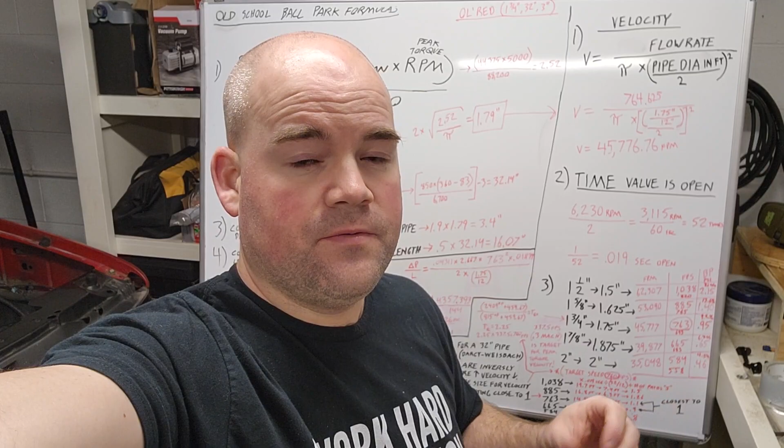This video is going to be two parts. The first part I'm going to give you some old school formulas that'll help get you close, and if that's all you care about, you can do with them however you want. For the rest of you more interested in the science behind it, we're going to talk a little more technical and go into how I chose what I chose for Old Red.

Alright, so I'm going to go over to the board and zoom this out a little bit. Old school formulas first. Old Red has 1 3/4 inch header primary tubes with 32-inch length primary and 3-inch collector. So, old school ballpark formulas.

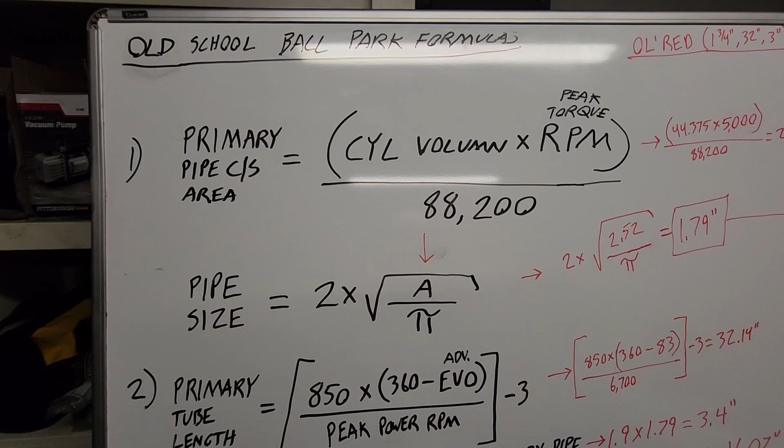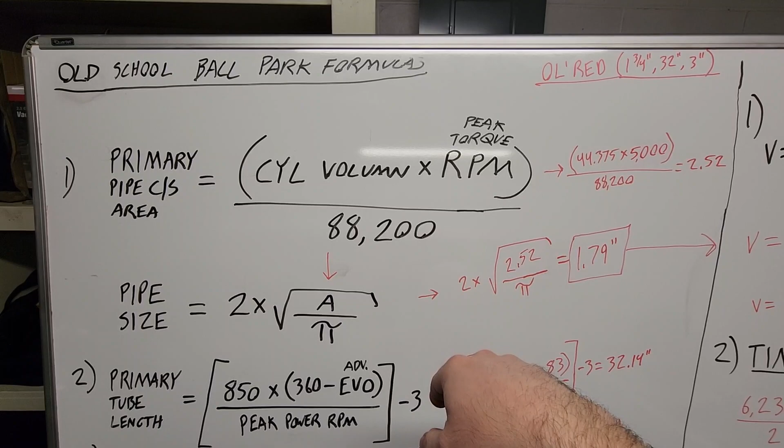Primary pipe cross-sectional area - calculate that first. If you have a 350 cubic inch engine, put that in divided by 8. Multiply that by peak torque RPM - if you don't know what this is, what do you want it to be? Divide that by 88,200, that'll give you a number here.

This is your area, cross-sectional area. So for a 355 small block, I have peak torque around 5,000 RPM, divided by 88,200, and that's your area.

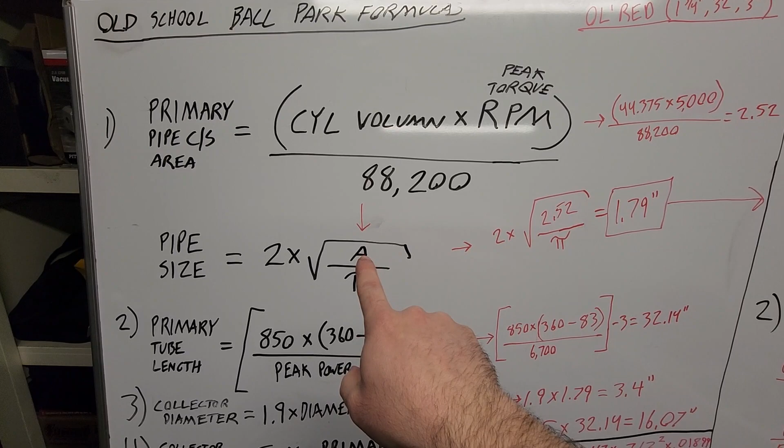Pipe size - I don't care about units, I don't have enough board space to put units for everything, so you'll be alright. Pipe size is 2 times the square root of the area we just calculated, divided by pi. So get that, 1.79 - pretty close to my 1 3/4 inch primary tube, so pretty close.

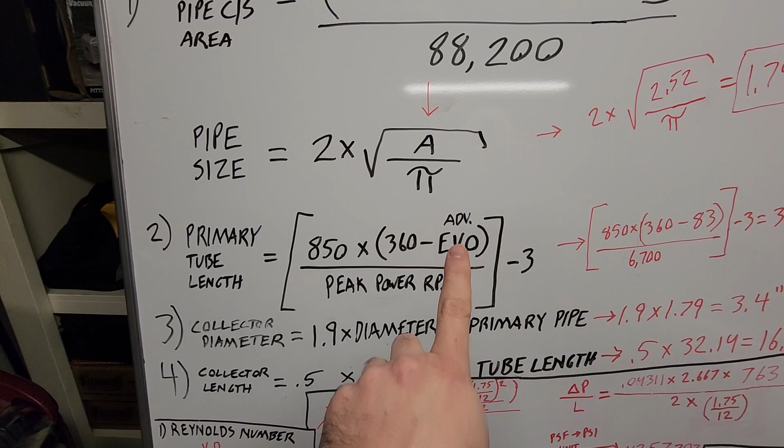Primary tube length: 850 times 360 minus advertised exhaust valve open. Do not use your at 50 thousandths number, use the advertised exhaust valve open before bottom dead center. Put that number in, divide that by peak power RPM.

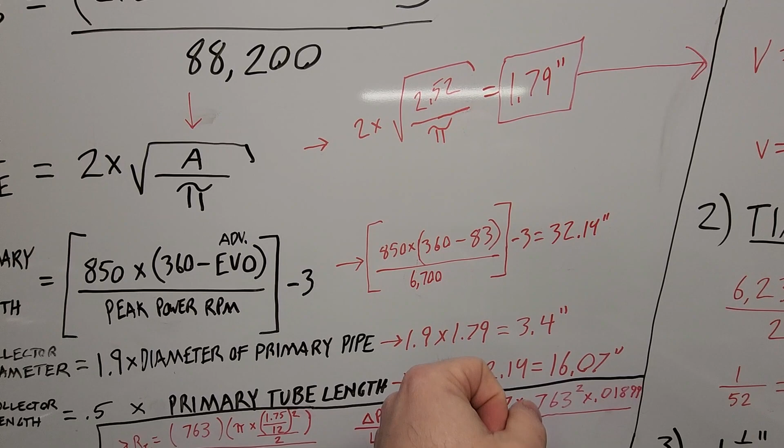850 times 360 minus 83 degrees before bottom dead center, which is when my exhaust valve starts to open, divided by 6,700 RPM - pretty much where I make peak power naturally aspirated, more like 6,300 under boost - and minus the 3, which I didn't mention. Pretty freaking close. Collector diameter is 1.9 times the diameter of the primary pipe.

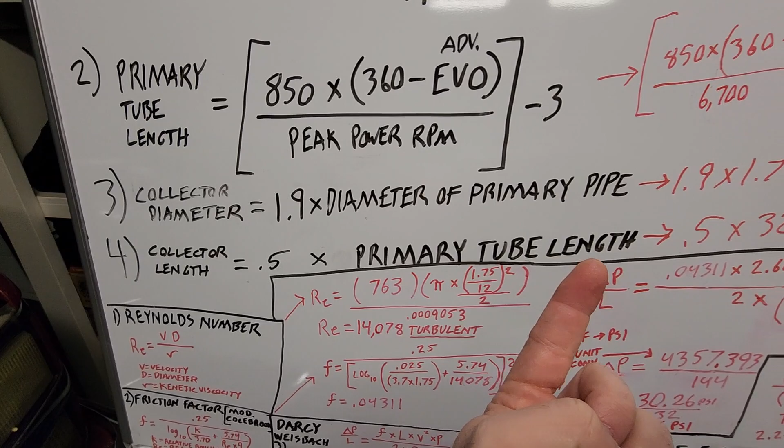That gives 3.4 inches, so a little bigger than what I'm running - there's a reason for that, but that'll get you close. Collector length is 0.5 times primary tube length, so 0.5 times 32 is 16 inches.

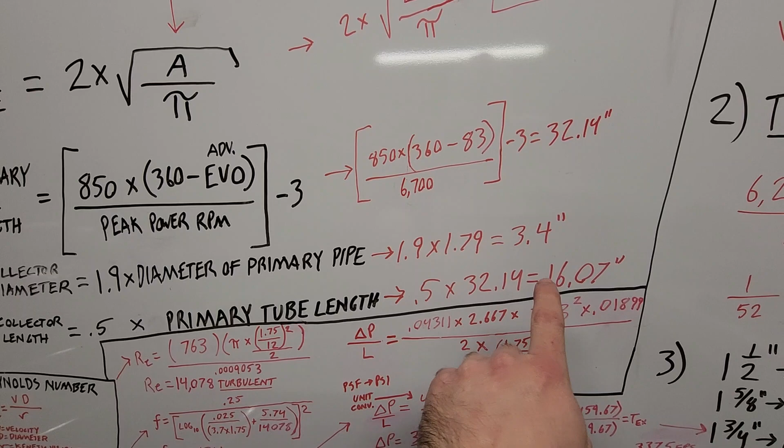What this 16 inches means is if you're running straight headers, you want a minimum of 16 inches past the collector. The reason you want that is due to velocity and all the things I'm going to go over. But if you run full exhaust, ignore this number, it means nothing to you. But if you're a race car or drag car with this setup, you want a minimum of this number past the collector.

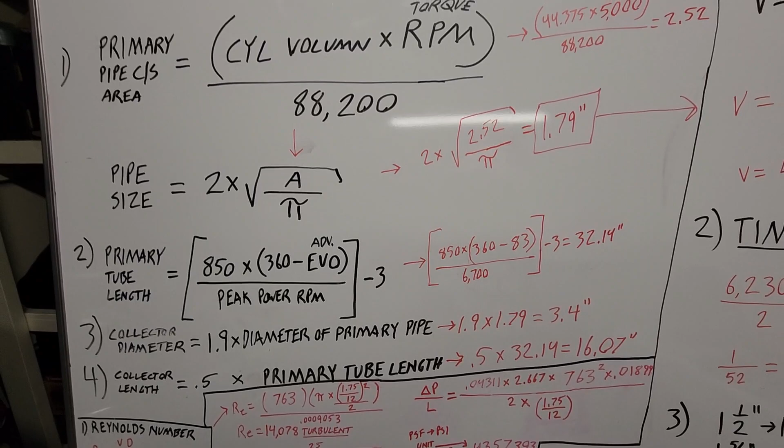Remember, this is an old school formula, not super technical, but it gets you pretty close. Minimum of 16 inches past the collector to maintain velocity enough to maximize your power and torque. Shorter than that number, torque's going to go down - guaranteed. Now that's the first part of this video.

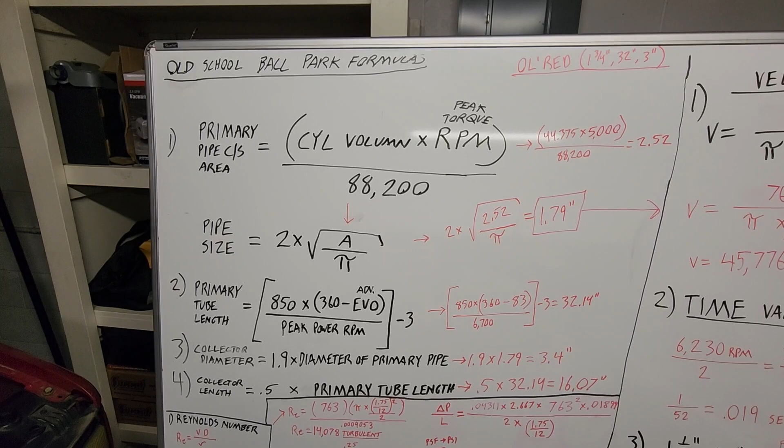So for some of you, if this is all you care about, I'll zoom this out to where you can get all these generic formulas, and they'll get you pretty close, and they'll be good for most people. Now if you're watching this video to learn and want to go over a little more technical detail, we're going to shift over here.

I didn't do a really good job managing my board, but that's because ideas just started flowing and I wanted to get it all on the board. So obviously I took up way too much space with the generic formulas, but anyway.

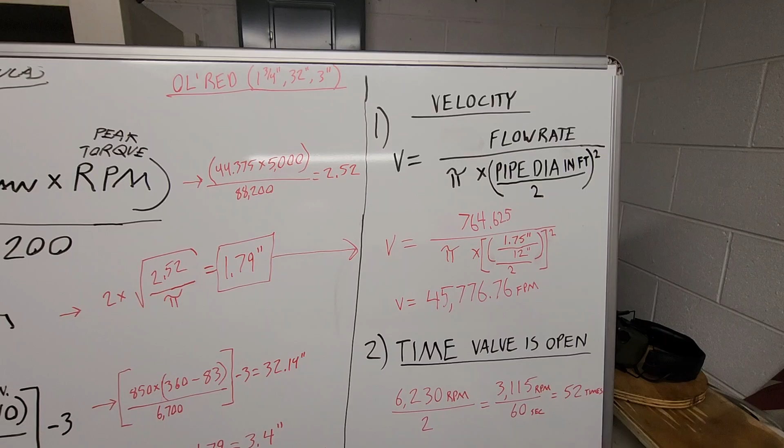In a previous video we talked about, for Old Red, how I figure out how much CFM I need for each tube. This number times 8 is the number we calculated that I need for the engine at peak RPM, which was 6,230 RPM, due to my boost and all the things.

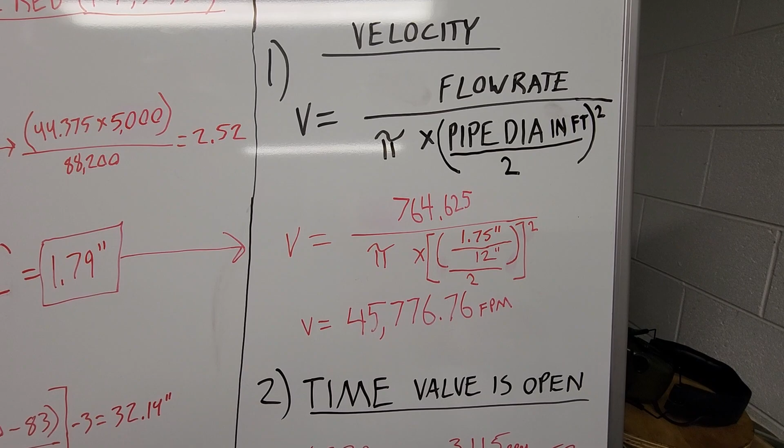I'm not going to go into this number, you can watch that video to get this number. So this is just pi r squared - that's all this is. And you've got to use the right units, okay - this is CFM, cubic foot per minute, so we can't use inches.

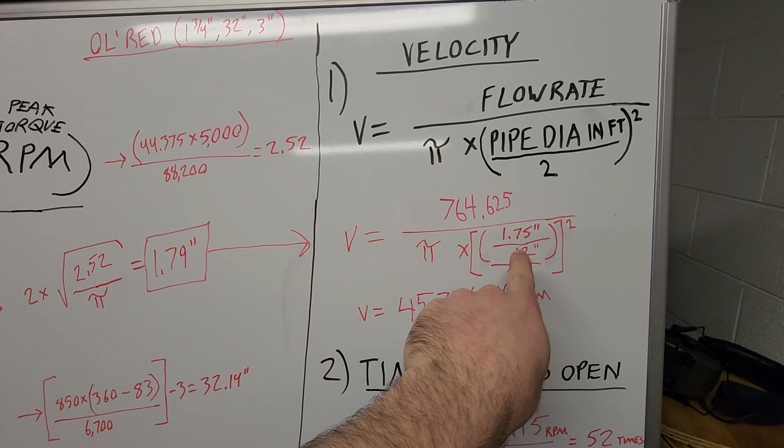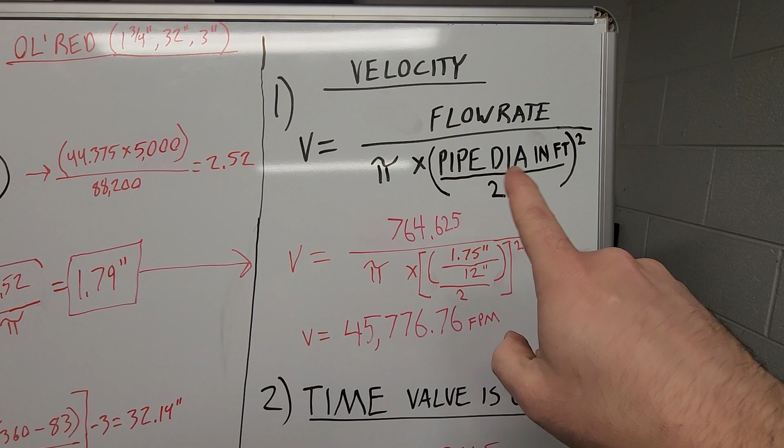You have to convert that to feet. So 1.75 divided by 12 gets you that diameter in feet. Then pi times the radius, which is the diameter in feet divided by 2, gets you your radius, squared. So this is just pi r squared. That gets you 45,776 feet per minute of velocity. So we calculated flow rate divided by pi times pipe diameter in feet divided by 2, squared.

Now, time the valve is open. This is where a lot of people don't realize how little time there is. At 6,230 RPM, for every 2 revolutions of the crank, the intake valve is open, so you got to divide that by 2. We didn't do that for CFM, and there was reasons for that, but in this instance we have to. So 6,230 divided by 2, because the intake valve opens 1 time for every 2 revolutions of the crank.

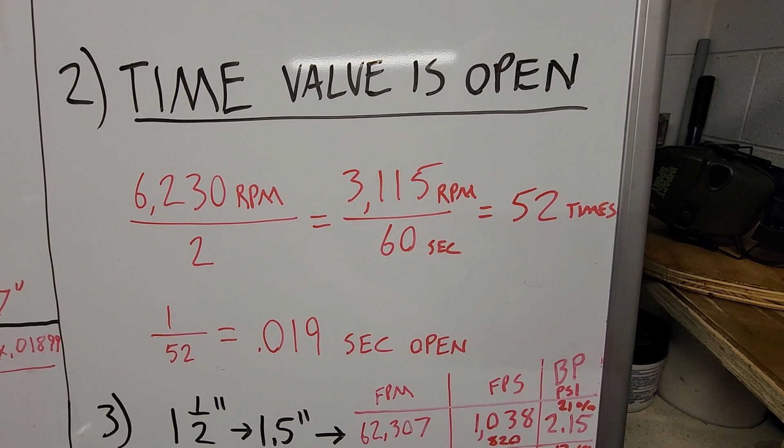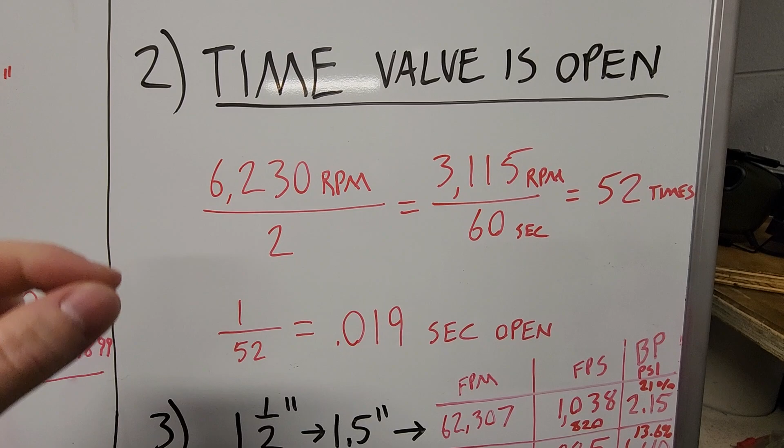That's 3,115 RPM. Divide that by 60 seconds to get rotations per second. So that means 52 times a second that intake valve is opening. That's a lot. So 1 divided by 52 gives us 0.019 seconds open. So for every time the crank turns over twice, our intake valve is only open 0.019 seconds. That is not a long time. That's a perspective thing for some people - they don't really calculate that and don't realize how violent it is, and why valve spring selection is so critical.

Now this looks like a jumbled mess, and I'm going to walk through it. The black part is what we're looking at first - this is just 1.5 inch, 1 5/8 inch, 1 3/4 inch, converted to actual inches. All I did was take these numbers, 1.5, 1.625, and plug them into this formula, replacing the 1.75, to get the velocity for each one, in feet per minute.

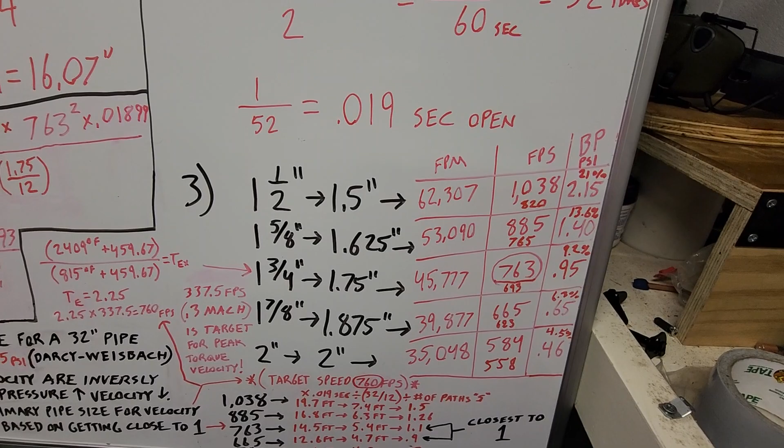But we're not going to work with feet per minute, we're going to work with feet per second. So you just divide all these by 60, and that's this top number. There's 2 numbers in each square, but it's the top number - we'll talk about the bottom number and this other column in just a few minutes. They all go hand in hand. So that gives us feet per second, which we'll need for the next part of this.

So now we're going to shift to what we've got to calculate. Before I go further, I'm going to go through some formulas used to figure out how much back pressure I will have in the exhaust. Back pressure is just a measure of restriction in the exhaust - you want to minimize it. There's so many myths out there that you got to have back pressure, that's complete garbage. Turbo systems are more critical for that, it's a ratio between pressure on the inlet side and the turbine housing, but we're not going into that here. If you have questions, send me a comment. I'm talking naturally aspirated, supercharged, nitrous, not turbochargers - you treat superchargers just like naturally aspirated for this kind of math.

So back pressure - pressure and velocity are inversely related, and pressure and volume are inversely related. The pressure and volume inverse relationship is Boyle's law. Bernoulli's principle is pressure and velocity being inversely related. Two tails of the same thing, Boyle's law and Bernoulli's principle. We're talking Bernoulli's principle - volume is affected by velocity, so velocity and flow are directly related. Back pressure, bad. Velocity, good. We need to maximize velocity while minimizing back pressure. The problem is, the higher the velocity, the more back pressure you're going to have, so it's a balancing act, and that's what we're going to talk about.

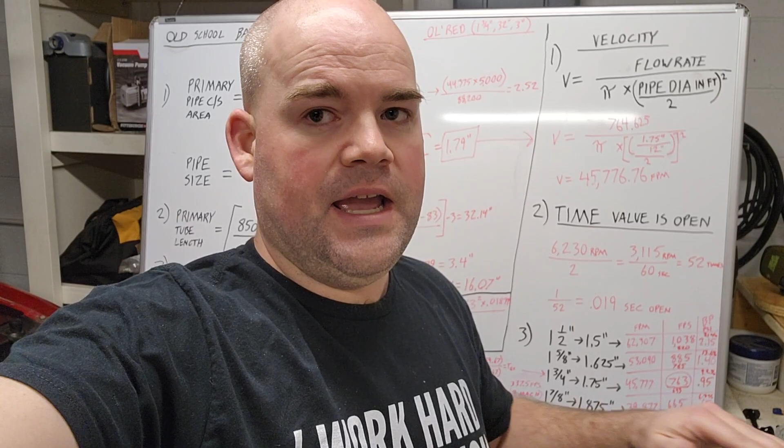First, we're going to go through the math on how we get to back pressure, because that's the complicated part. Then once we have back pressure, how we get that into affecting our velocity numbers and how we use that to figure out what we need. We're going to go into Darcy-Weisbach and Reynolds number and a lot of things, and we'll talk about each as we go through. If you have any other questions or want more clarification, just send me a comment.

All right, the first thing we need to calculate is something called the Reynolds number. What Reynolds number means - you can look this up for a more formal definition - but basically, the higher the Reynolds number...

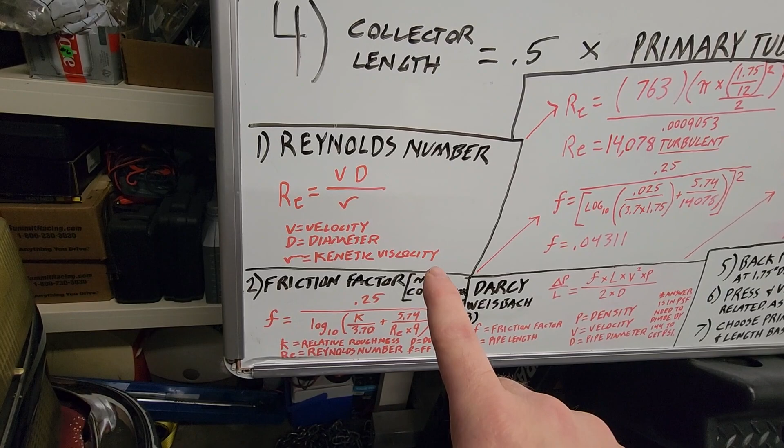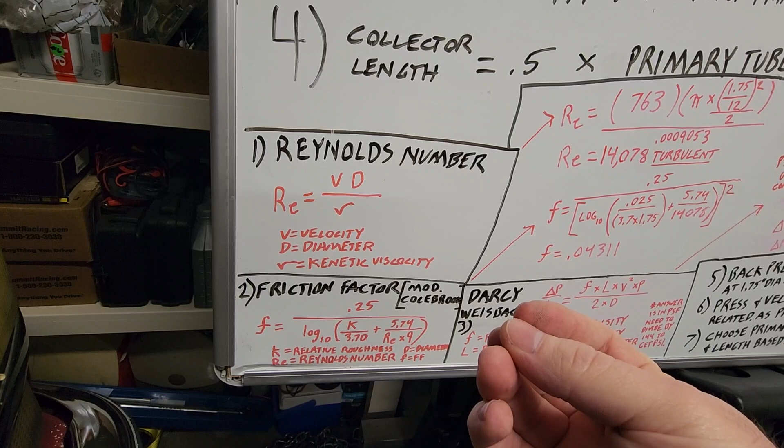I talked about this in my last video, a couple videos ago, before I was talking about the supercharger on Old Red being upgraded - we talked about eddy currents. So you have laminar flow, turbulent flow, and that transitional area in between. A Reynolds number over 3,000 is considered turbulent. Some people say 4,000, but between 2,000 and 4,000 is kind of your transitional area. It's not a perfect science - it depends on density and all the things. But Reynolds number tells us how turbulent our flow is.

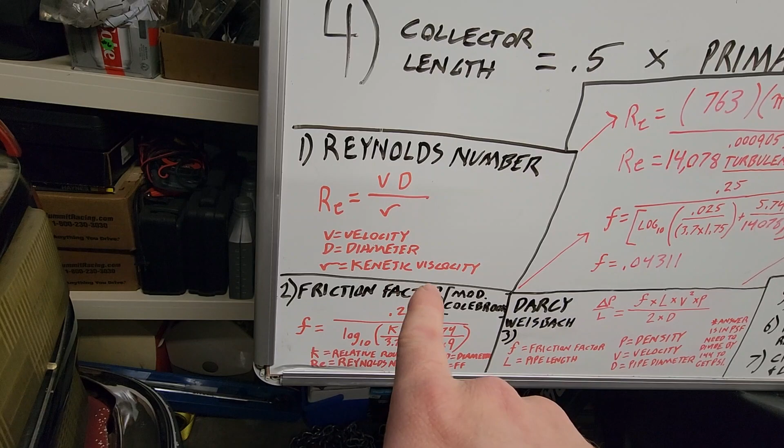So the first thing we have to do is calculate the Reynolds number, and I'm going to do it over here, but I'll just talk about it first. So we get our Reynolds number, and Reynolds number is nothing but velocity times diameter divided by kinetic viscosity. Now this kinetic viscosity number - I don't want to get into on this video how we find this number, but if you're curious I can tell you, or you can look it up. It takes some math, it's not super simple, so I don't want to get bogged down on technical discussions of how I get to each of these things. But if you have questions, I can tell you. So Reynolds number: velocity, diameter, kinetic viscosity.

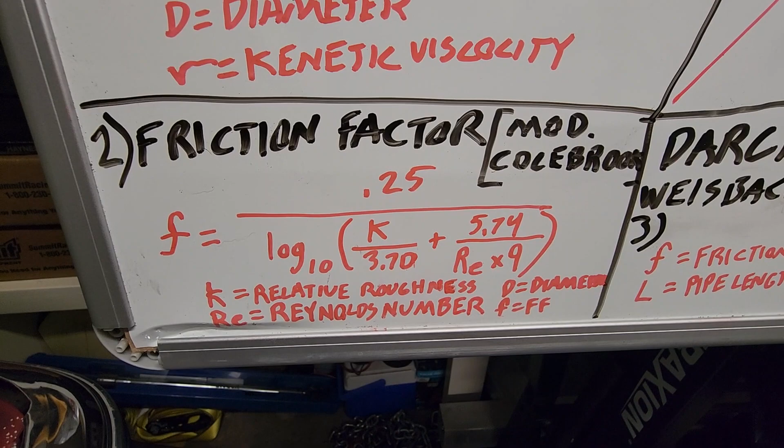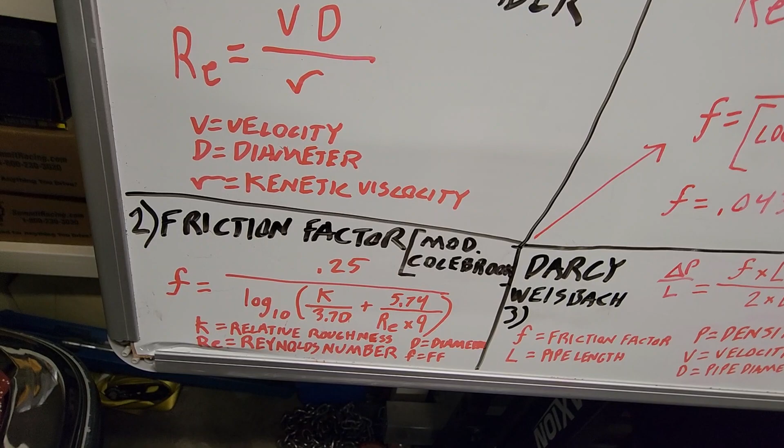After we get our Reynolds number, we need to calculate the friction factor. We use the modified Colebrook equation to get that - MOD Colebrook. That's 0.25 divided by base 10 log of the relative roughness of the material we're using divided by 3.7 times the diameter, plus 5.74 divided by Reynolds number times 9. So the Reynolds number we calculated we need for the Colebrook equation - all these other numbers we have. Then you do a log base 10 of this denominator. Do not miss that step. That'll give you your friction factor.

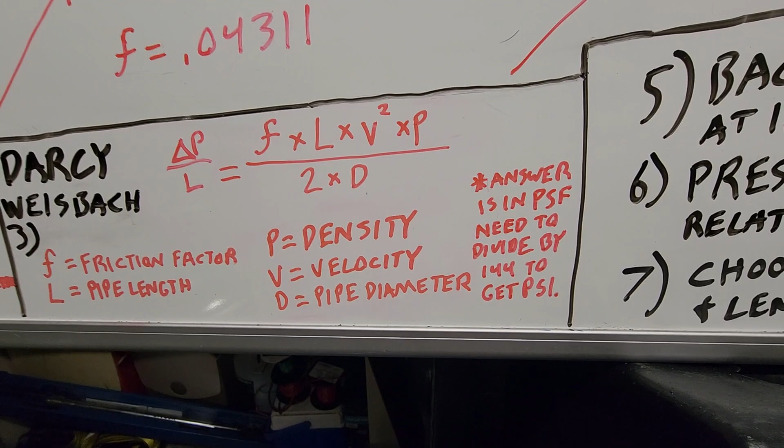Next, the Darcy-Weisbach formula: delta P over unit length, so pipe length, equals the friction factor we just calculated, times the length, times velocity squared, times density - so you have to find density - divided by 2 times the diameter. The answer comes out in pounds per square foot, so we need to divide by 144 to get PSI, pounds per square inch.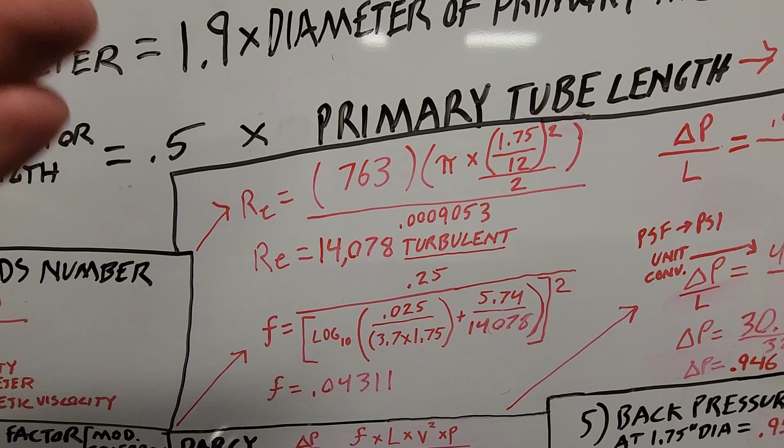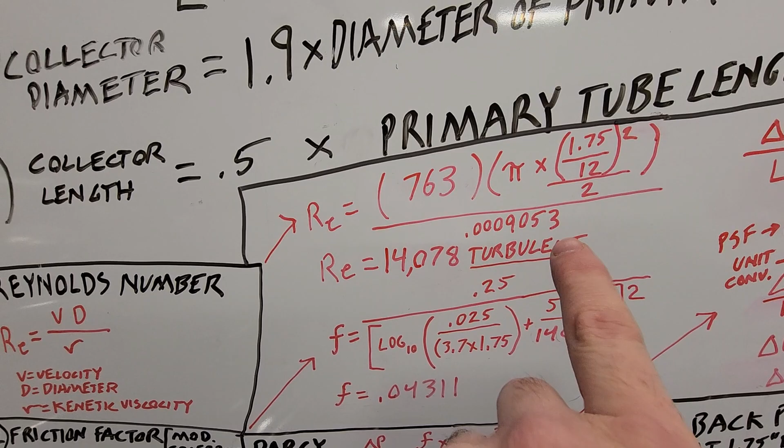All right, now we're going to put some numbers to this. Reynolds number, using the 1.75 inch - I did this calculation for all the different ones, but we're just using my example for Old Red, and I did the math for the others which give different numbers. 763 is the number here, in feet per second - I didn't write the units down because of room. Then pi r squared, divide that by 0.0009053. I'm not getting into how I got that kinetic viscosity - you'll just have to trust me. That gives us a Reynolds number of 14,078. I'll go ahead and say that's extremely turbulent, which we'd expect out of the exhaust system - very high temperature, high pressure, traveling at very high velocity, so there's going to be a lot of turbulence. That's a pretty critical number to have.

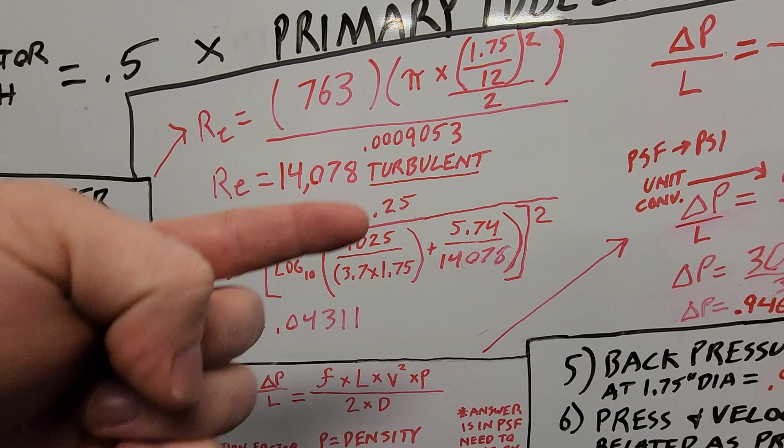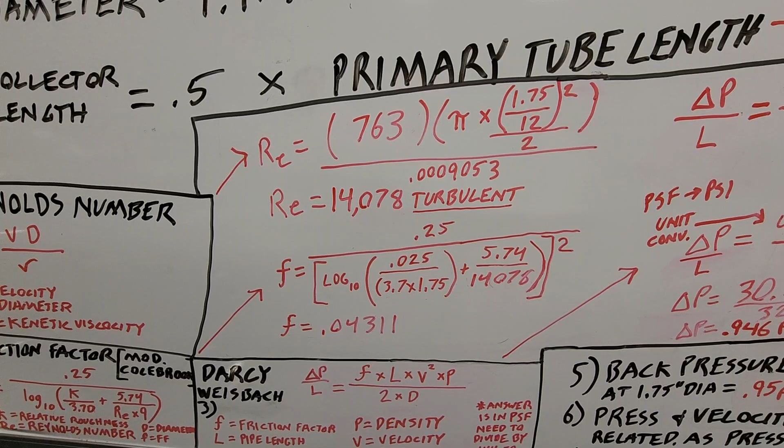Now we're going to go to our modified Colebrook - log base 10, just a base 10 log, and I'm not going to go into it again since we talked about all the numbers here. 0.25, and we got all our stuff - that's 3.7 times 1.75, and we're doing all 5.74, and our Reynolds number up here, times 9. I ran out of room here clearly, but that'll give us 0.04311.

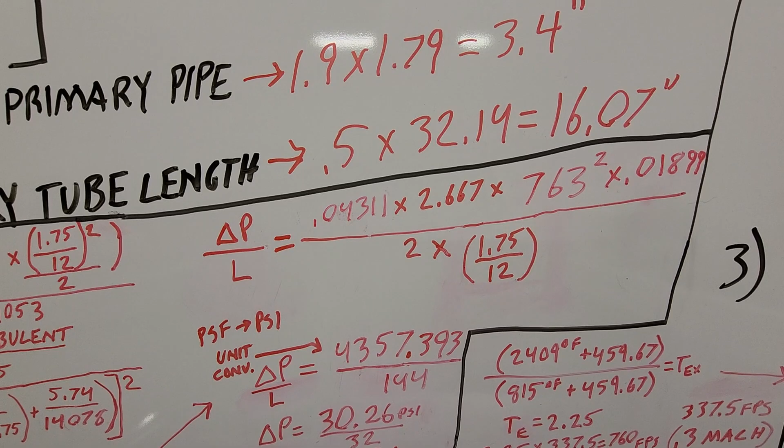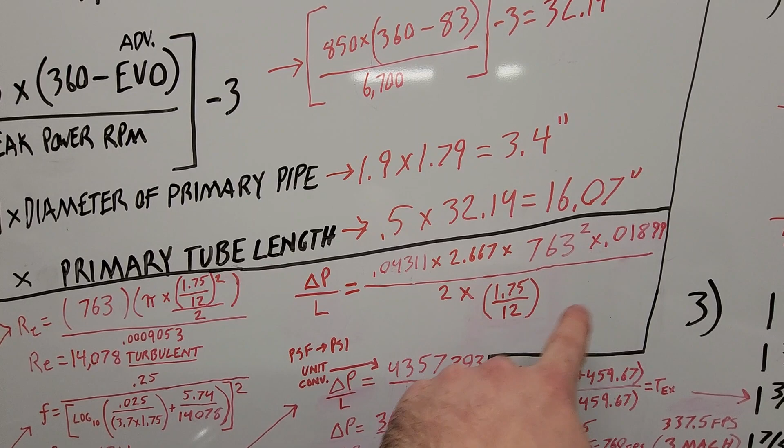Now we're going to use our Darcy-Weisbach: delta P, unit length. 0.043, that's our friction factor, times our length, times velocity squared - and this is basically your conversion. 32 inch primaries divided by 12 gets you 2.67 foot. It's very critical that you convert your units so all the units are speaking the same language. The friction factor is unitless, so that doesn't matter, but you cannot use inches here because your answer will give you pounds per square foot. So you have to convert your 32 inch length to feet, times 763 squared - that's our feet per second.

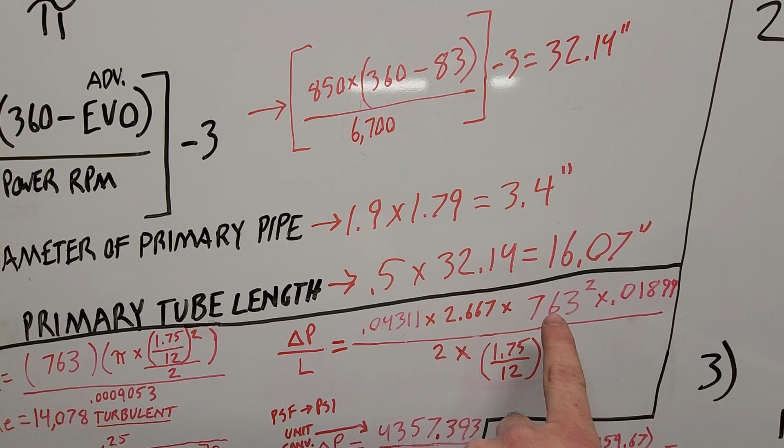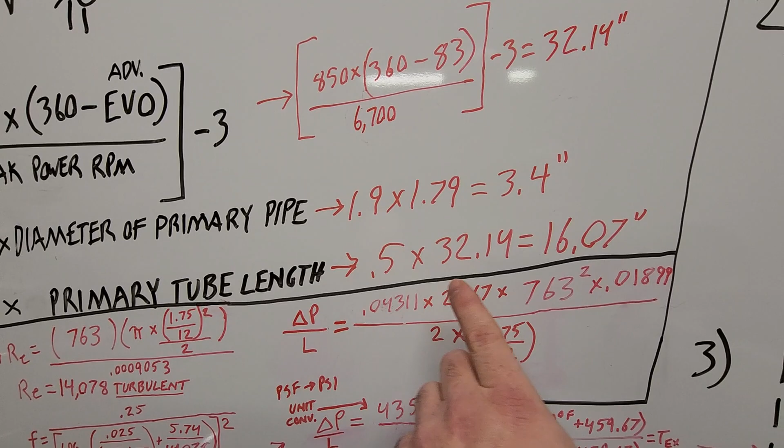Okay, so again, that has to be in feet per second. Now times 0.01899, that's our density. I'm not going to get into how I calculated density in this video, but if you have a question, I can tell you. You just got to trust me. 2 times 1.75 divided by 12, that converts our 1.75 inch primary to feet. Again, all this has to be in feet, the units have to speak the same language.

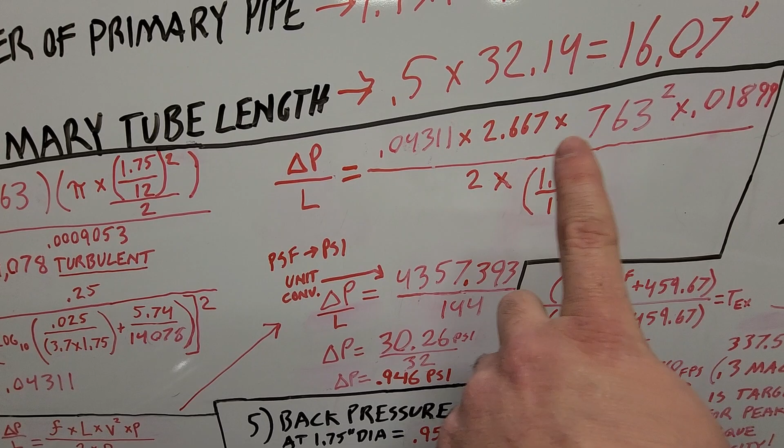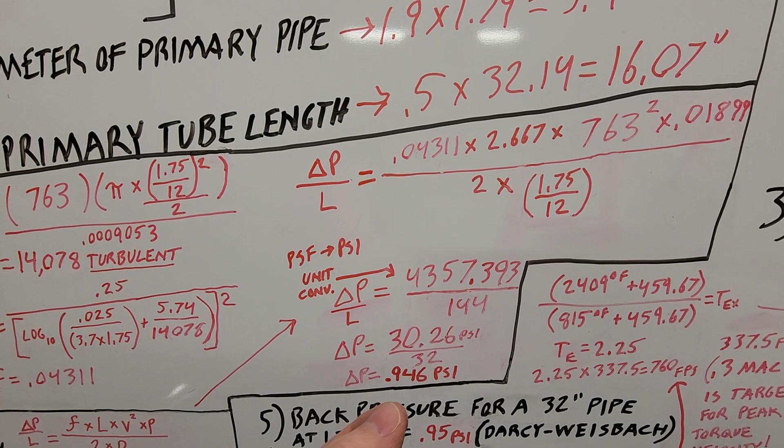If they don't speak the same language, your answer will be wrong. So we get delta P over L, which is our length, unit length. 4357.393 is our answer with this equation. We have to divide that by 144 to convert it from pounds per square foot to pounds per square inch. So that's 30.26. Now we have to divide that by 32, and that gives us 0.946 psi. So our back pressure with our 32 inch pipe is 0.95 pounds per square inch. So down here at 5, back pressure for a 32-inch pipe at 1.75 inch diameter is 0.95 psi using our Darcy-Weisbach.

Real quick, before Darcy-Weisbach is a formula that you use for incompressible fluids, mostly water and things of that nature. I'm going to tell you why it's relevant here. Is the reality a little bit different? Yes, because we're talking about compressible gas. It's a gas, it's compressible. It does change the density per unit length, so the back pressure can be a little higher, which will hurt flow. But I will tell you why it's relevant for what we're doing and how we choose our correct velocity. I'm going to keep going, so just trust me.

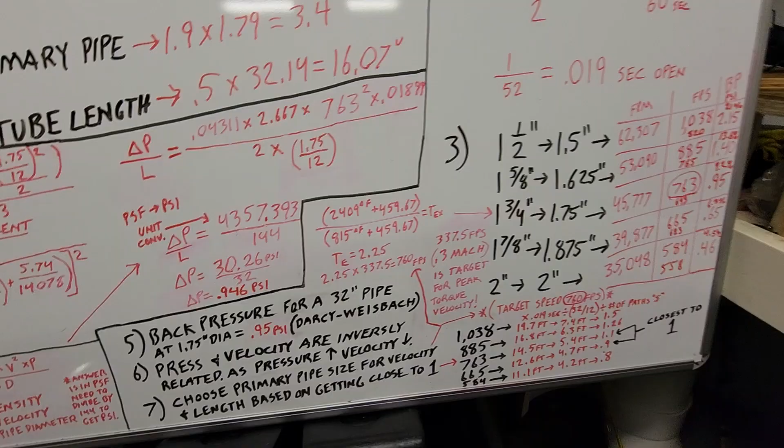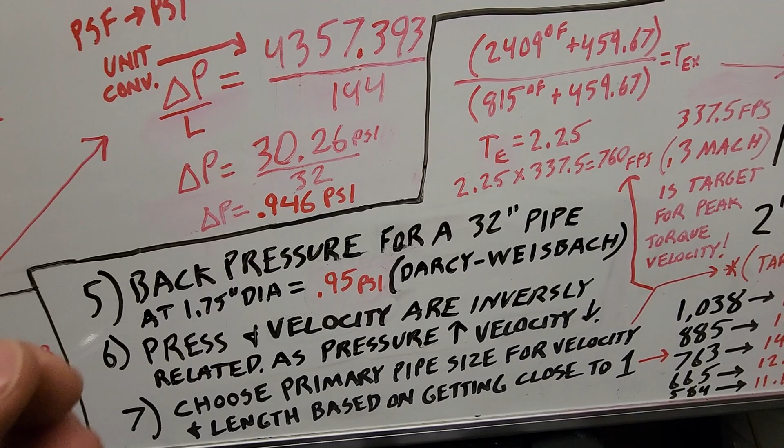All right, now pressure, this is just what I said: pressure and velocity are inversely related. As pressure goes up, velocity goes down. So as the back pressure, which is how much restriction in the exhaust pipe we have for our primary pipe due to the tube length and the diameter, okay, both things are related to this. As the back pressure goes up, velocity goes down, which means volume goes down based off Boyle's law.

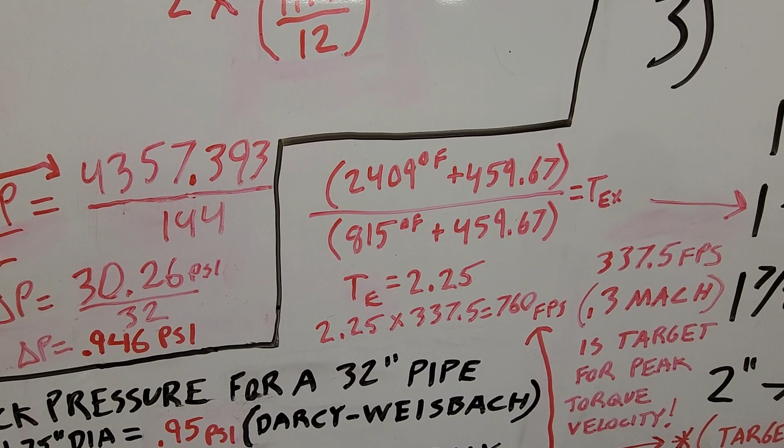Regardless, I covered this, this is the volume expansion calculation that we talked about in a previous video, so I'm not going to get into it here. Watch that video, I'm going to try to put a link to it here, but this is important, you have to do this.

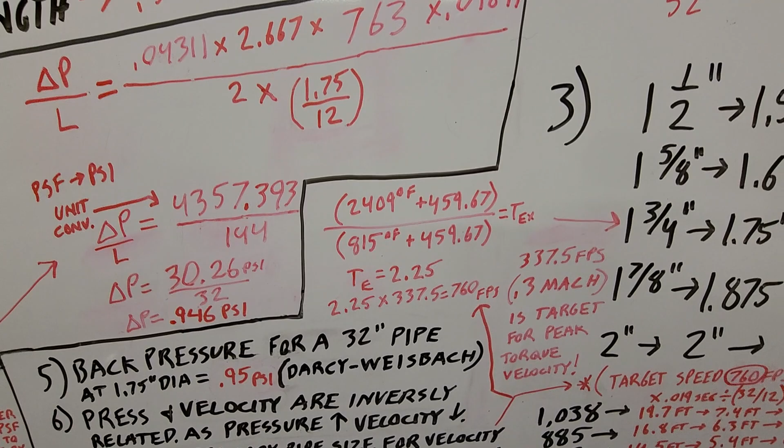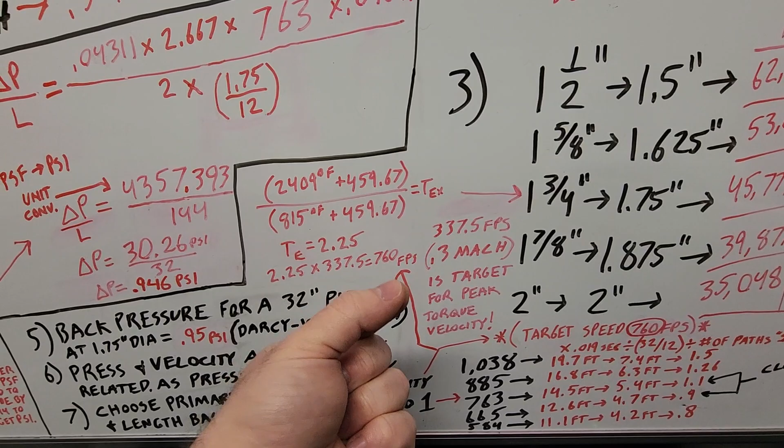So our target, if we're doing an intake valve, if we're flow testing an intake, you want the localized velocities everywhere in the port to be 337 feet per second, as close to this number as you can without exceeding it. It's basically 0.3 Mach. The reason for this 0.3 Mach number, I did videos on this years ago. At 0.3 Mach, compressible gas behaves as an incompressible fluid. Once you get past 0.3 Mach, more eddies, more turbulence, higher Reynolds number. But at less than 337 feet per second, you can calculate it based on an incompressible fluid. So we want to target this velocity.

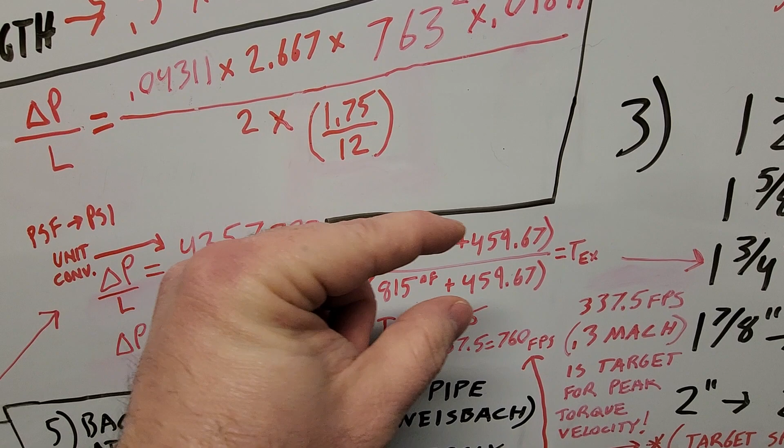However, we have a thermal expansion that happens on the exhaust side. So on the intake side, 337 is our number, however your thermal expansion is going to be the new target. So my thermal expansion is a 2.25 multiplier. So 2.25 times 337.5 is 760 feet per second. That is my target velocity that I want. So going back to our chart over here, what is the closest to 760 feet per second? 1 3/4 inches. That is why I chose what I chose.

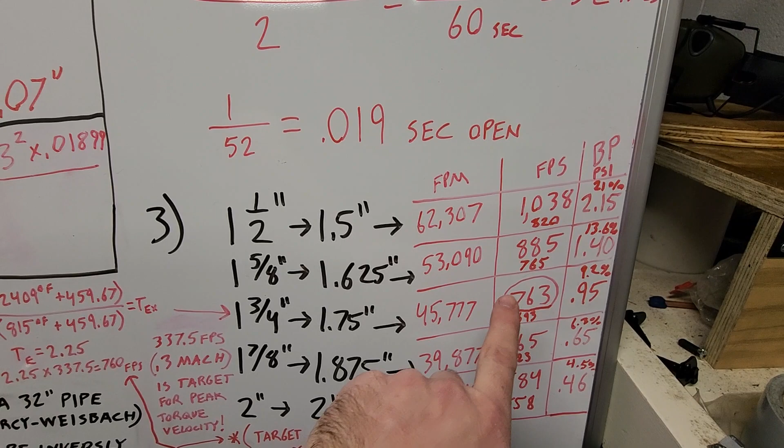However, we have back pressure, okay, we're going to get into that. The next thing we have to talk about is length based on getting close to 1.

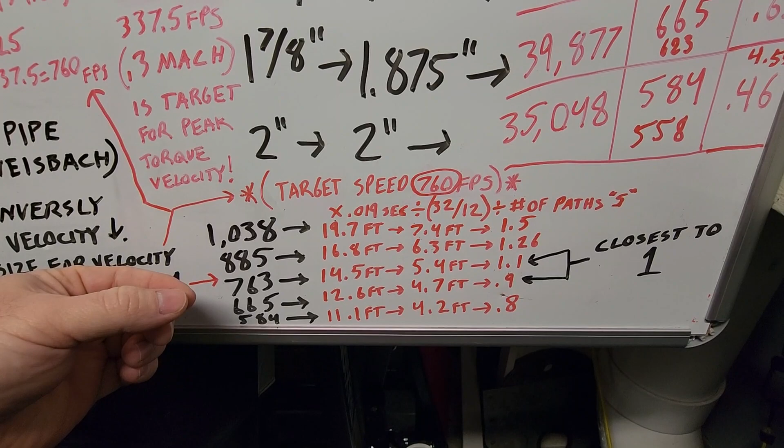Okay, so here's what we're going to talk about here. So these numbers here are just these feet per second numbers, I just wrote them down here. Whenever your exhaust valve opens, based on it being open for only 0.019 seconds, this is how this works: 1038 feet per second multiplied by 0.019 seconds, that means when that exhaust valve opens at this velocity, the exhaust gases will travel 19 feet in 0.019 seconds. That's amazing, that's a long distance, that's outside your tailpipe.

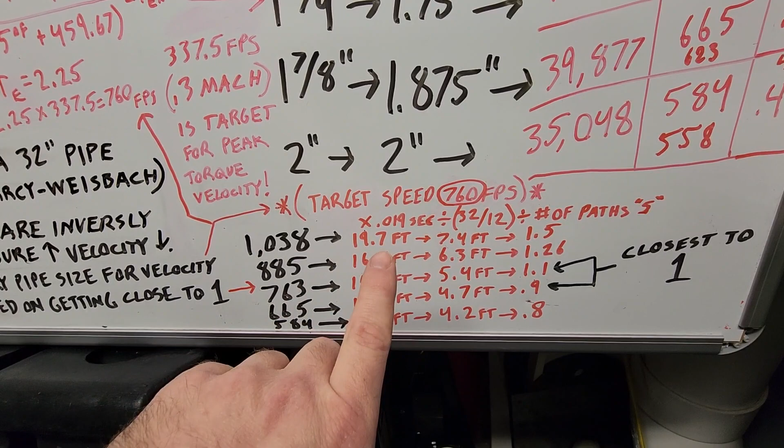Now we're going to get into this, so now we're going to divide that.

Okay, we have to convert into feet. So 32-inch long primary pipe divided by 12 gives us our feet. We're going to take this 19.7 divided by this number, and that gives us 7.4 feet.

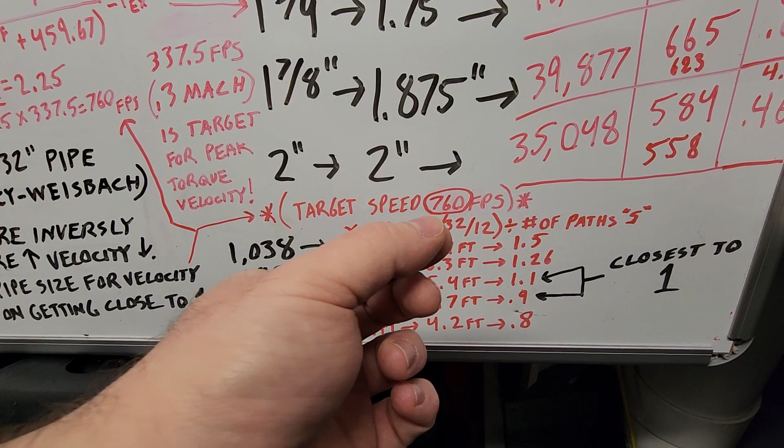Okay, 7.4 feet, just stay with me. That's how far it's going to travel. This is based on how many different pipes we have. This is not as critical right now, we're going to get into it with the next number.

You're dividing that by number of paths. So in a header that has 4 primary tubes, the exhaust gas has to travel to the collector, and a reflective wave has to travel back. That's 2 paths. But how many other primary pipes do we have? 3. So that's 5 paths.

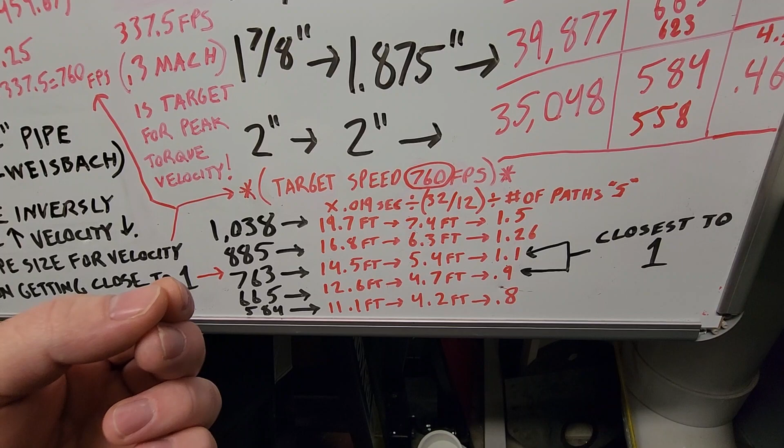The exit would be 6 paths, but we're not counting the exit because we're talking about a negative reflective wave. A negative reflective wave does not go up the main exhaust system, it only goes up the primary pipes.

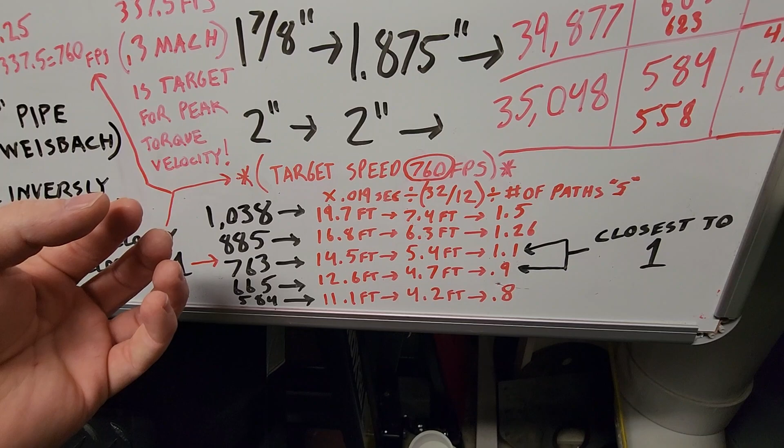Because it's at a higher pressure, it dissipates your lower pressure wave, since 14.7 psi outside atmospheric pressure is going to be at a higher pressure. So it's going to slow you down. The only path we care about is these 5. It's got to go down, and then 4 negative waves are going to travel up your primary pipes.

That does 2 things for you. One, if you time that correctly, getting it as close to 1 as possible, you will have a negative pressure wave during the entire time the exhaust valve is open. That helps scavenge the cylinder, and during intake overlap, when the intake valve is open and the exhaust valve is open at the same time, it will help pull more intake.

It'll give you a higher pull on the intake at low, because when the piston is at top dead center, you're on split overlap. The piston is not traveling down the bore yet, and since it's not, you do not have that delta P created in the cylinder to help pull the intake charge in.

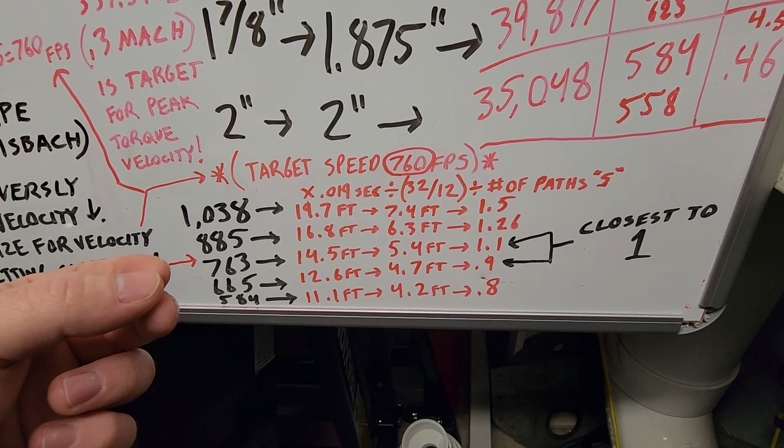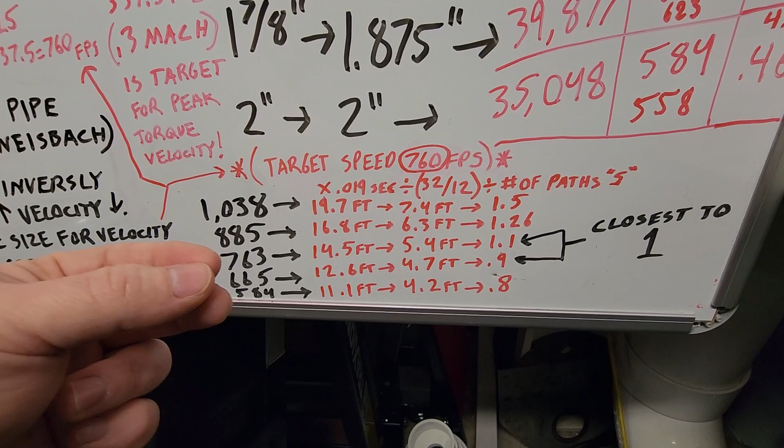So if you time this correctly with your velocities, if you manage your velocities correctly, and you get this as close to 1 as you can, you will maintain a negative pressure wave in the exhaust system during overlap, pulling intake charge in before the piston starts moving down the bore. That is the critical part of this, okay?

So, which ones are closest to 1? You can see it here. I'm not going to do the math for all these. This is the math: you times it by how long the valve is open, divide that by your primary pipe length converted to feet, and then divide that by number of paths, which on a V8 with a header is going to be 5 paths. And that changes based on if you have a V6, and so on.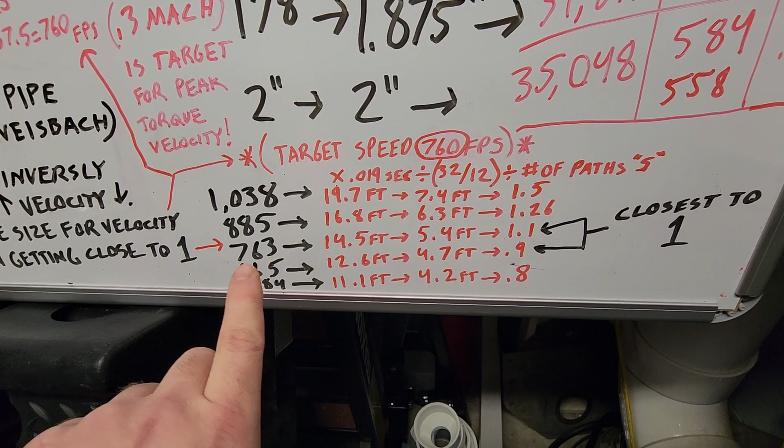The closest to 1 is our 763 and our 665, and those are our 1 3/4 inch and 1 7/8 inch headers. If you're greater than 1, that means your negative wave is coming back up and traveling a little bit further down, which means you have positive pressure at the back of the valve. Not good, that slows down the intake charge coming in.

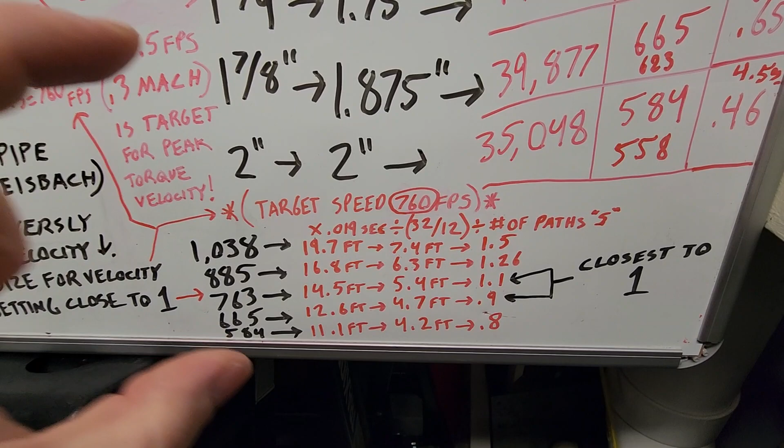If you close at 1, you had a negative pressure wave all the way up until valve closure. If it's greater than 1, because of the back pressure, you're going to have a positive pressure. It's going to get closer and closer to atmospheric, equalizing. And when it equalizes, you're no longer pulling intake charge in, and you're also no longer scavenging the cylinder.

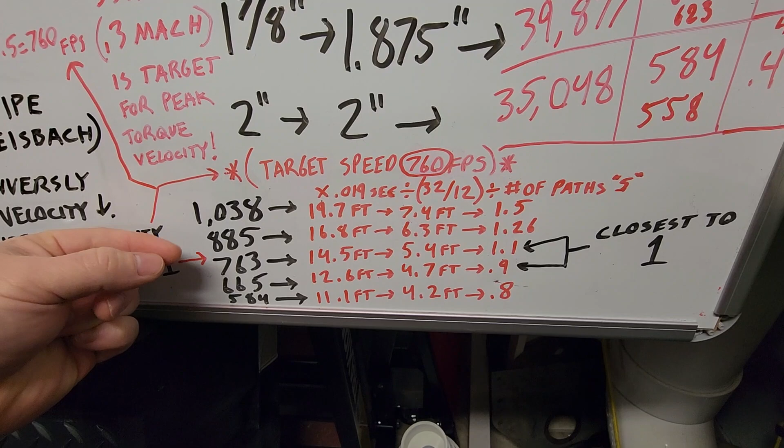So, not good. Less than 1 is okay, but again, the further below 1 we get, we're not maximizing that reflective wave all the way to the back of the valve through the entire exhaust valve open event. So you want to be as close to 1 as you can on this. So these are my 2 good ones.

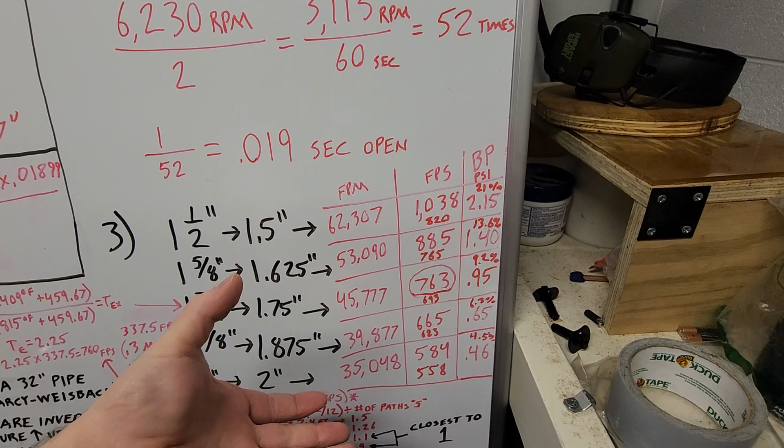Now, last part. So doing this formula for all the different pipe sizes, we have back pressures of 2.15 psi, 1.4, 0.95 which is the one we talked about, 0.65, and 0.46. It makes sense, back pressure goes down as the pipe gets bigger because it has less restriction to flow, less Reynolds number, less velocity, lower Reynolds number, less back pressure.

It makes sense, okay. So, what are these percentages? These percentages are how impactful that back pressure is to your velocity.

This means at 1038 feet per second with 2.15 psi of back pressure, that's 21% robbing. So you only get the remainder. You have to subtract 21% of this, which is 820. So feet per second is going to actually equal about 820... 765. Hey, that number looks really good. That's close to this number.

Okay, so we're going to talk about that some more. Our target number, which was perfect before, has dropped some. This one, 665, less impacted, and less impacted again.

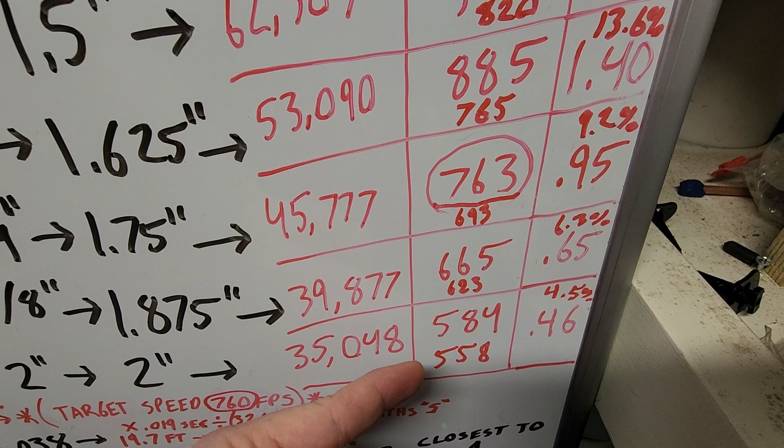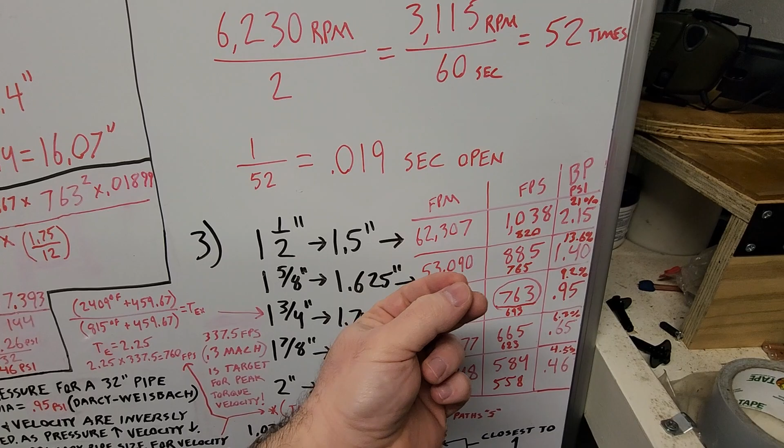So now, why is 1 3/4 inch perfect for my application? A couple of reasons. One, flow. A 1 5/8 inch primary pipe does not flow 764 CFM at my pressure. I did this on a different video, but a 1 5/8 inch is not going to flow enough volume. Velocities are good due to back pressure, but volume is not good. So this, no good. Just because velocity is good, we've got to keep in mind how much volume we can flow. So 1 3/4 inch is perfect. Yes, velocities aren't optimum, but they're as close as we can get and stay at 1.

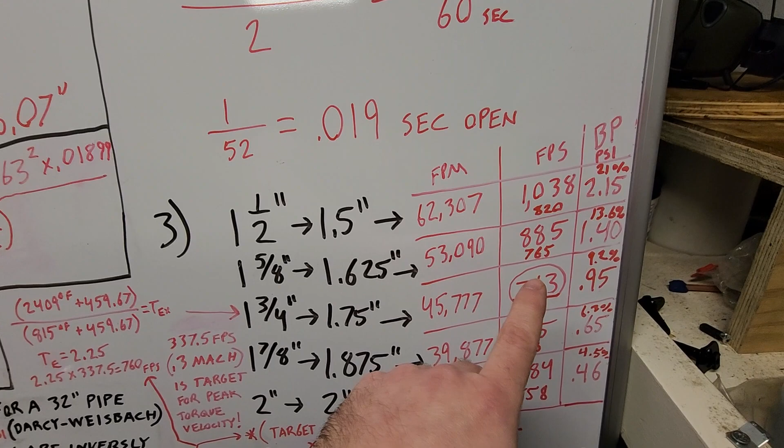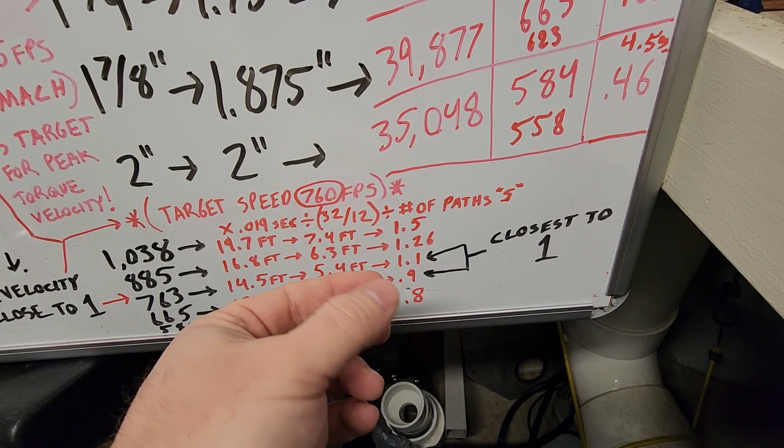The other problem with a 1 5/8 inch isn't just that the velocities are good, or that the flow isn't where I want it for volume. It's also not close to 1. Now, these numbers do shift down a bit due to back pressure, but back pressure hasn't happened when the valve opens instantaneously during that entire sweep, so these numbers will go down. It is close to 1, but it is not 1, and the problem with this one is volume flow, not really so much here. So the 1.1 will actually go below 1 and becomes perfect. I hope that makes sense.

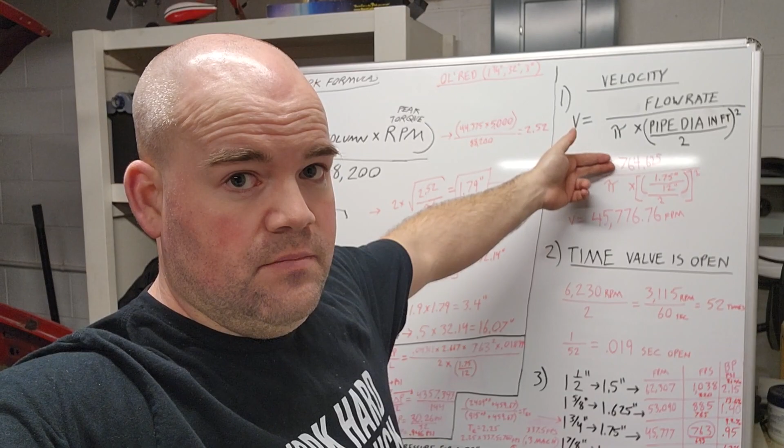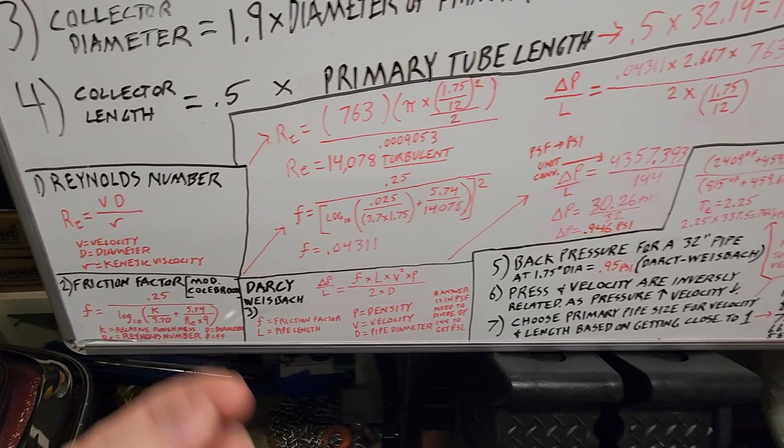Pressure and volume are inversely related. Pressure and velocity are inversely related. We want to target 337 feet per second velocity at every localized point on the intake side. But due to thermal expansion in the exhaust system, you have to apply the multiplier, and that gives you your target. You can play with the numbers, put your flow in here based off doing the math for your own application from one of my last videos, and then work through this using these same numbers, because these kinematic viscosities, densities and such are all based off that 1500 degree exhaust temperature, which is pretty close for most high performance builds.

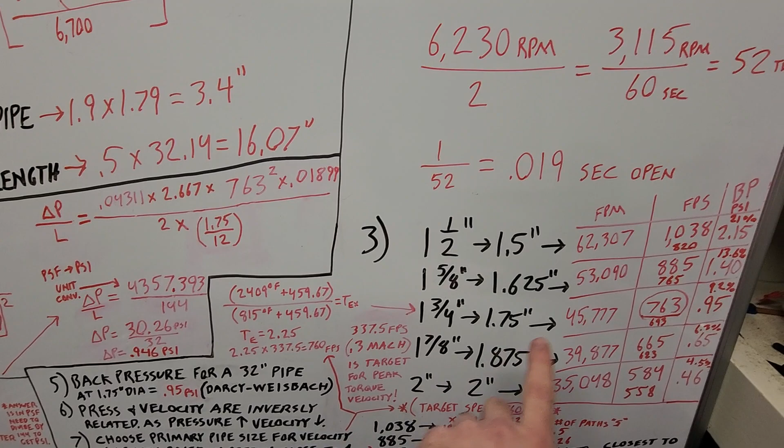So a lot of this stuff's going to relate to you. I'm going to zoom out to where you can see the whole board in case you want to take a screenshot of all the information at once. But I hope this helps. Those are the reasons why I chose a 1 3/4 inch and a 32-inch length. You can adjust these lengths and diameters and get as close to 1 as you can given these back pressures. Now, pressures are based off my 32-inch length and my 1 3/4 primary. These back pressures are based off a 32-inch length primary tube, obviously with these different primary diameters. So if you're using any of these diameters at 32 inches, there you go.

Now, the last thing about what I was saying here is, why does this matter? Well, we talked about the existing open cylinder. It also matters because you want to tune that — you tune your primary lengths. Now, Old Red has 'tuned' pipes — I say they're tuned, but they're not really tuned. Tuned primary pipes just mean they're all exactly the same length. That would be perfect if the cylinders fired in such a way that mattered, but they don't so much.

Firing order: 1-8-4-3-6-5-7-2. Cylinder number 1 fires, then 8, 4, 3, 6, 5, 7, 2. So the reason why you want to have, for example, 5 and 7 fire in sequence — 5 fires and then 7 fires — they maximize scavenging perfectly on those, because when 5 fires it gives that negative reflective wave on the back of both valves at the same time. Then 7 fires, and as soon as it does, it already has a negative pressure wave in that primary to help draw out that cylinder.

But they're not all like that, because of the firing order it doesn't always work out that way. But it's just one of the things. Highly tuned race engines — these tri-Y, split-Y, merge collectors, all these trick things — they only matter if you're tuning it based off of this stuff. You want that negative pressure wave to be on the back of the valve that's firing and the back of the valve that's scavenging. You want it. And if you can get that tuned perfectly, then great.